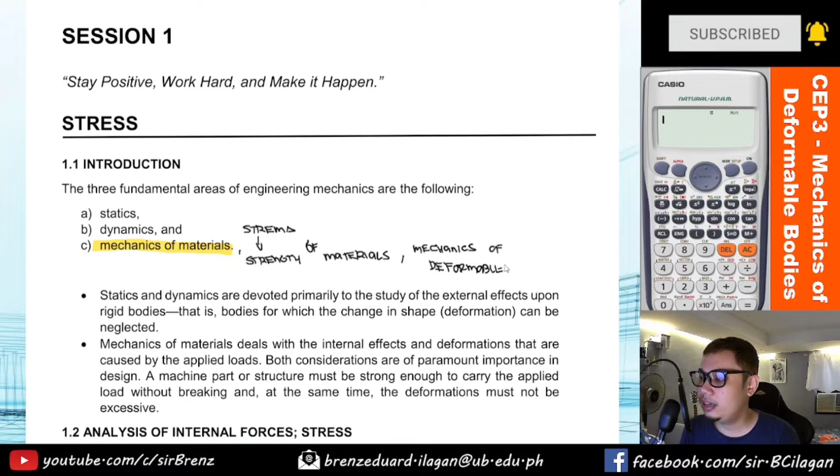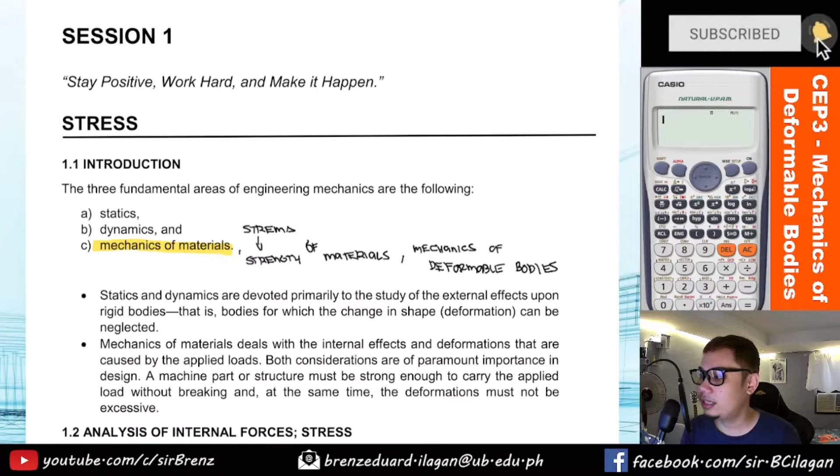So, basahin natin. Again, definition natin before, under statics and dynamics. So, these 2 areas are devoted primarily to the study of the external effects upon rigid bodies. So, bilugan ko lang yung rigid bodies. So, main concern natin dito ay yung mga external force and then yung magiging effect niya on rigid bodies. That is, bodies for which the change in shape, or the deformation, can be neglected.

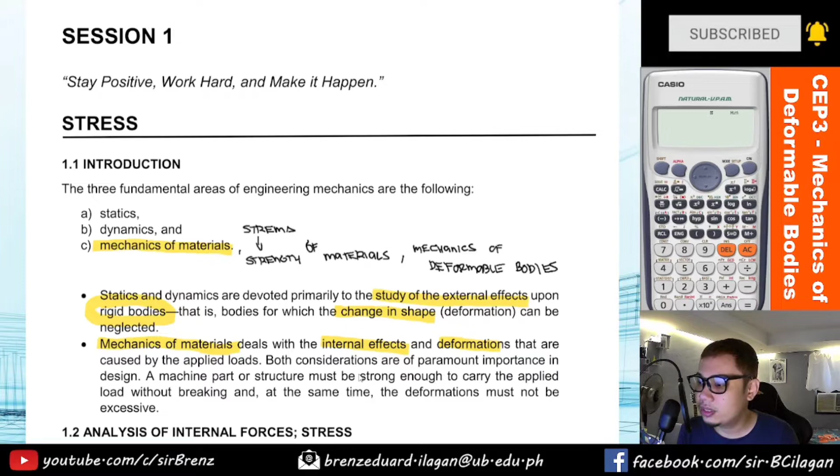Before kasi under SRB, ina-assume natin na yung deformation niya is sobrang liit na ni-neglect na natin siya. Pero dito, under mechanics of materials, kahit gaano kaliit yan, we need to consider that, especially when designing a part of a machine or any structure. Okay? So, both considerations are of paramount importance in design. So, a machine part or structure must be strong enough to carry the applied loads without breaking and at the same time, the deformations must not be excessive.

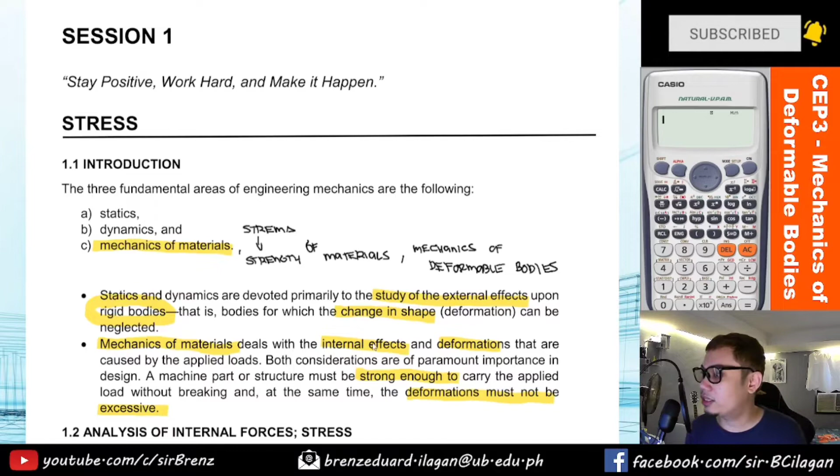So under 1.2. Analysis. Baba ko lang saglit. Analysis of internal forces, under stress. So, in mechanics of materials, we analyze to determine the internal forces.

Determine the internal forces. That is, forces that act on a cross-section that are internal to the body itself. Okay? So, just like for this figure, under figure 1.2, this represents the external forces acting on a body. So, meron tayo ditong body. This is in the shape of an S-shaped section. Ayan. Kung mapapansin nyo, meron tayong mga forces dyan na naka-applied, externally applied load.

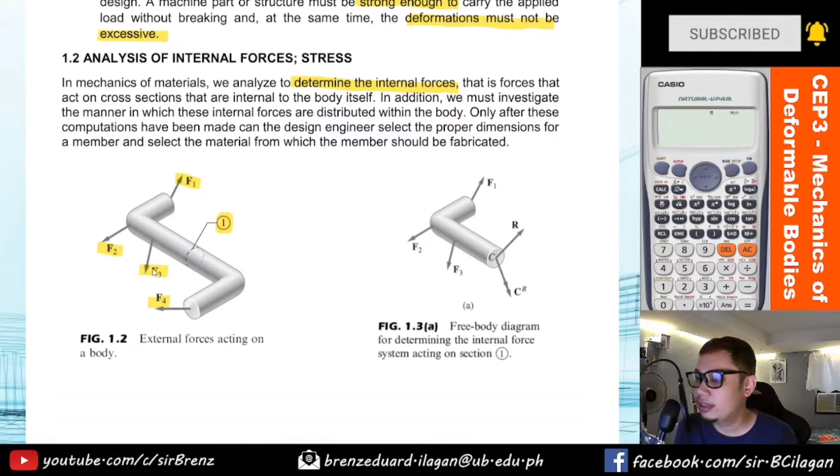So, we have F1 going in this direction. We have also F2. We have also F3. And we have also F4. Okay? So, ang sabi nga dyan, internal forces that act on a cross-section that are internal to the body itself. So, that section under the body is represented by this number 1. Napansin nyo yung 1, nag-section siya dito. And ano yung shape na nabuo sa section natin? Diba, as you can see, circular section yan. Tama ba?

So, lagi pala tong... Teka lang ha. Tulak.

Ayan. Circular section. So, again, because of this externally applied load, nag-cause siya ng internal reaction dito sa section 1. Okay? So, yung circular section na yan, sa formula ng stress, later on i-discuss pa rin naman yan, na P over A, so yan yung area natin, yung cross-section ng area, or yung section ng body na ina-analyze natin. Alright? So, only after this computation have been made can the design engineer select the proper dimension for a member and select the material from which the member should be fabricated.

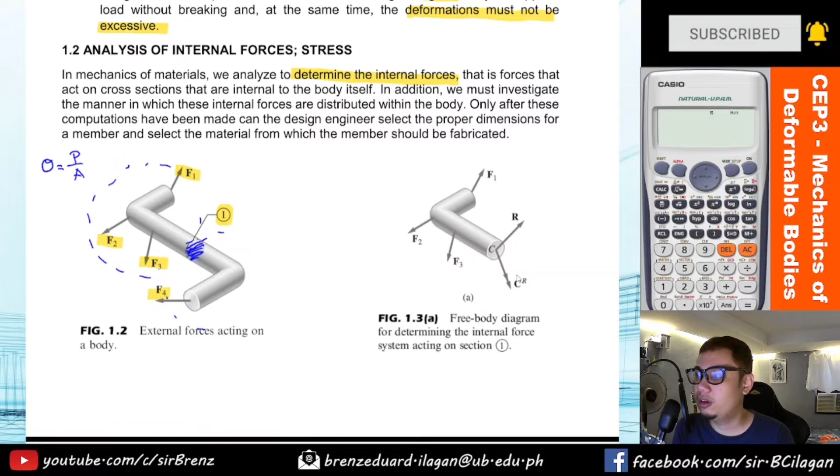Okay? So, again, under figure 1.3a, ano ba yung sinasabi nito? Kapag nag-section ka, maalala nyo, it's either i-consider natin tong upper portion, or pwede rin natin i-consider itong lower portion. Nagkataon lang on this figure, ang kinonsider is yung upper portion. And as you can see dito sa center ng inyong section, which is a circular shape, nagkaroon siya ng internal forces. So nandyan papasok si R, which is going in this direction. And meron kang C raised to R, or this is a couple. Okay? Couple moment.

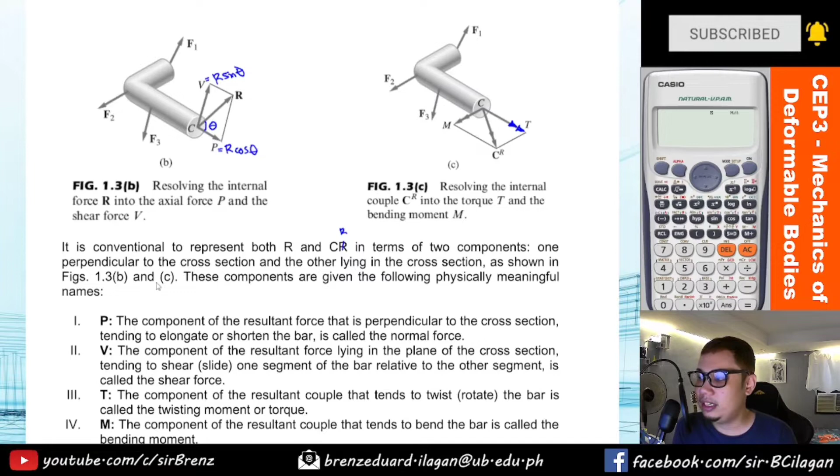Okay? So, and yung kanyang parallel component with respect to sa cross-section is represented by the symbol M. So, yung M natin, that represents the bending moment. So, from the term itself, bending, it causes the section to bend. So, these components are given the following physically meaningful names. So, i-define natin kung ano-ano yung mga forces na yan.

So, unahin natin siguro yung P. So, again, ano ba yung P natin? Based on the diagram, this is the perpendicular component of the resultant R. So, P is the axial force, the component of the resultant force that is perpendicular to the cross-section. So, this force P tends to elongate. When we say elongate, hinihigit niya. Or that is a tensile force, which tends to elongate or pahabain yung section, or to shorten the bar. So, kapag shorten, compressive siya. So, this is also known as the normal force.

Pero guys, on some books, this normal force, isa pang tawag sa kanya, pwede mo siyang i-define as your axial force. This can be also called the normal force. And again, this normal or axial force can be represented into two. So, meron tayong two types niyan. We have the tensile force and we have also the compressive force.

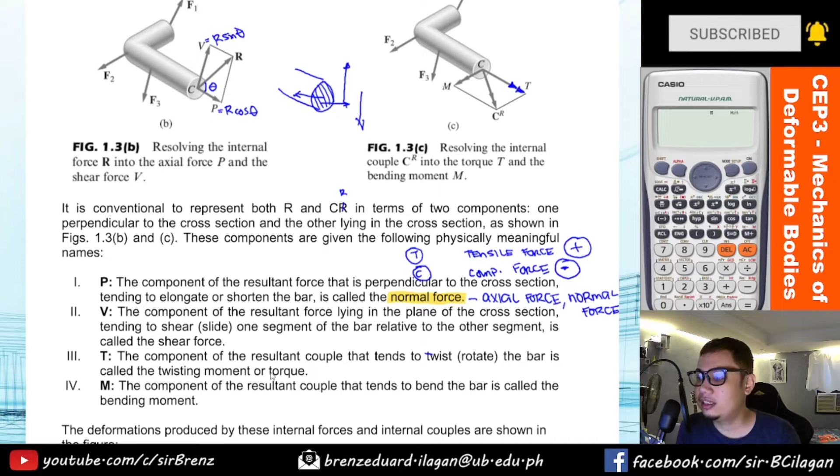Next, we have also the T. Yung T natin, that is just the torque. So, define natin what is T. This is the component of the resultant couple, yung C raised to R natin, that tends to twist or to rotate the bar, and is called the twisting moment or torque. So, another tawag for torque is the twisting moment. From the term itself, twisting moment, tinitwist niya. For example, ito yung bar natin. It's either pa ganyan yan, di ba? So, yun yung T natin. It's either represented ng pa ganyan or pa kabila.

So, twist. Yung moment mong ganyan, parang pinipilipit niya. Kung mapapansin nyo, parang nag-twist talaga siya. Ano ba yung kinakain natin nung bata, yung marshmallow na twist? Parang ganun yung concept niya. Twisting. And this twisting moment or torque, dyan papasok si torsional stress. So, that is another topic, I think module 3. Under module 3 natin, twisting moment or the torsional stress.

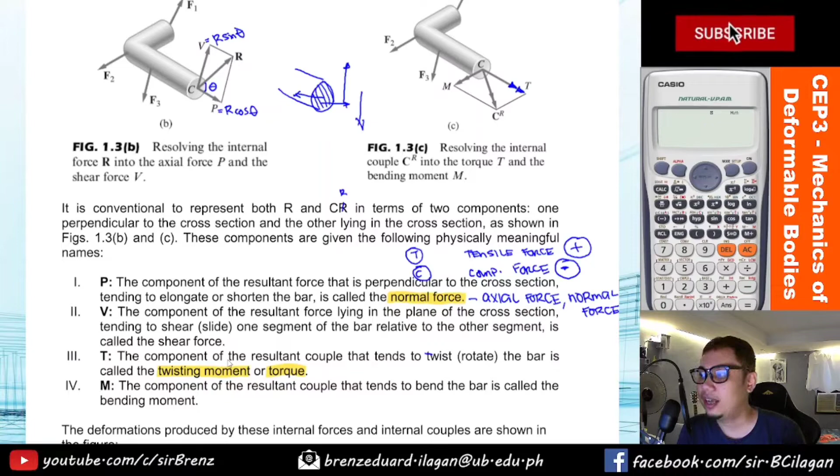And last, we have the moment or bending moment, represented by the symbol capital letter M. This is the component of the resultant couple that tends to bend the bar, called the bending moment. By the definition itself, for example, ito yung bar. Ang torsional stress is going in this direction, either pa ganyan or pa ganon. Yung bending moment naman, it's either pa ganyan, kung mapapansin nyo, na-bend. Pwedeng pababa, pwedeng pakaliwa, pwedeng pakanan, pwedeng pahilis. Basta parang binebend niya. Yung M na yan, gagamitin natin, guys, sa pag-compute ng bending stress. Those are stresses in beams, sa padulong part yan. That will be the last topic if hindi natin matatakal yung topic na deflections.

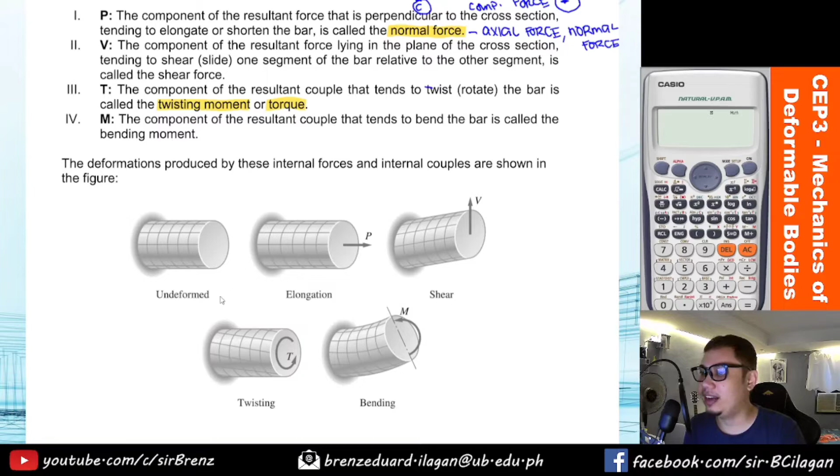And so, to further illustrate, ito pala, may diagram palang pinakita dito kung ano yung nangyayari. Based doon sa mga component nga ng mga internal force na yan, ito yung mangyayari doon sa ating bar na ina-analyze. So, this is the undeformed state. So, when we say undeformed state, walang nangyari sa kanya. Yan yung original shape niya. Yung mga forces na ina-analyze natin kanina, hindi pa naka-apply.

So, again, yung force P natin. Itong P na to, dinemonstrate nyo siya as a tensile force P. So, originally, ganito lang yung length. Ayan. So, ito lang yung length, original length ng iyong bar. But because of this axial force P, yung L mo nadagdagan ng certain deformation. So, mas humaba.

Again, yung axial force, meron pa siyang isang klase. So, ganito naman yung magiging itsura niya kapag compressive force yung in-apply natin. So, anong nangyari lang naman dito? Kung mapapansin niyo yung axis niya, kapag ginawa mo siyang compressive force, mas naging dikit-dikit siya. Yung axis na yan, nire-represent na yan, nag-elongate. Kung mapansin niyo dito, yung gap dito is lumaki, compare dito. And then, if the original length is L, ngayon naman, ibinawas mo yung deflection. So, mas lumiit yung rod natin.

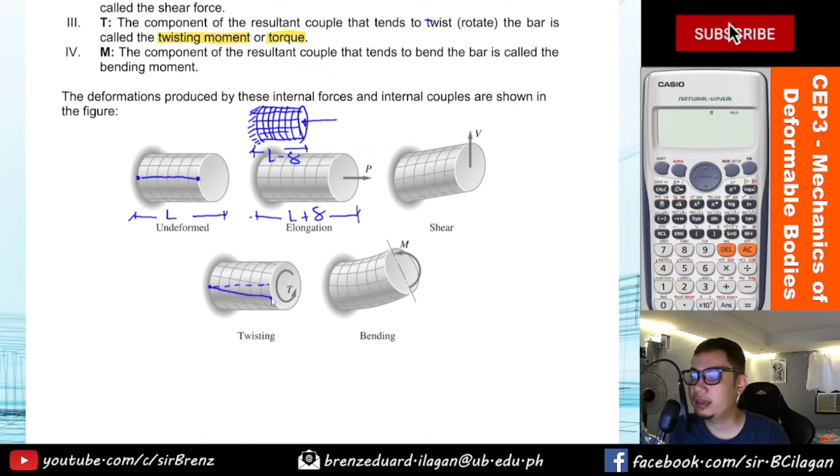Next, for the twisting moment or yung torque nga na tinatawag. Kung mapapansin natin, initially, pantay yan, diba? Ngayon, because of this twisting action, coming from this position, anong nangyari? Nagkaroon ka ng angular deformation or meron ka ditong theta. So again, itong theta na to, that will be discussed pa rin doon sa mga susunod na topics, particularly in the topic of torsional stress. Ito yung version ng deformation dito sa axial stress, yung simple stress natin. Parang ito yung counterpart niya pagdating doon sa torsional stress.

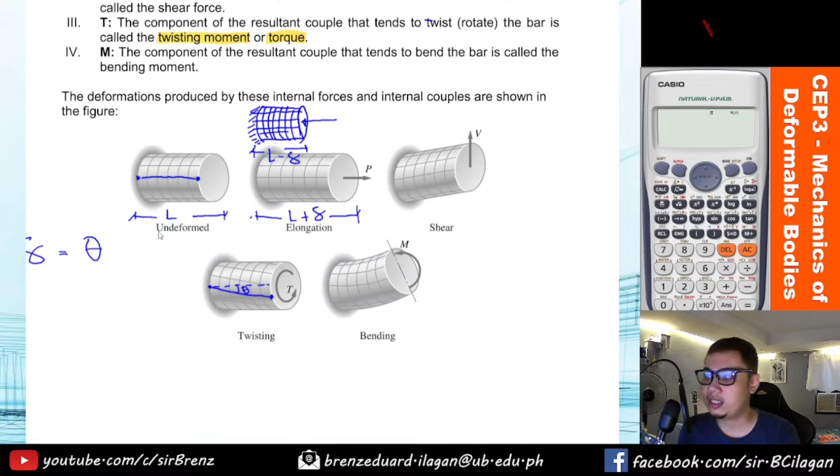Okay, so ano ba yung dimension ng stress natin? Ano yung unit ng stress natin? That is represented by the unit of force over L squared or the length squared. Yung L squared natin, that is just the area. So pwedeng meter squared yan, pwedeng inches squared, depende sa unit. So again, you need to review or recall the conversion from SI to English units.

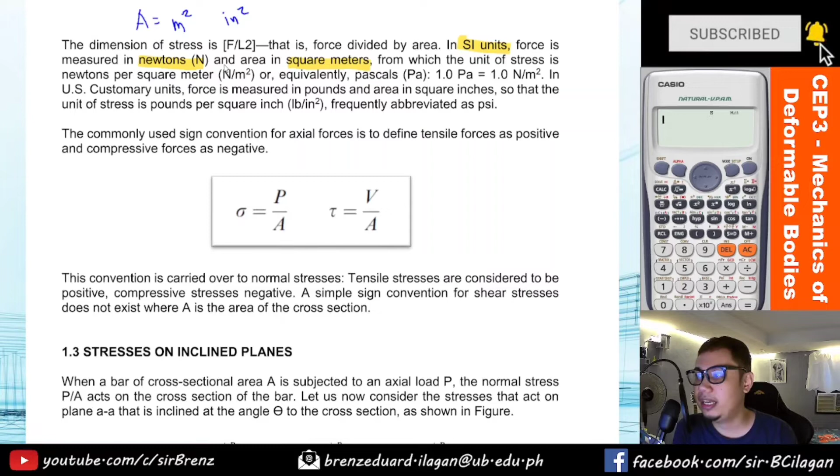In SI units, the force is measured in newtons. I know you're very familiar with newton. So pwedeng kilonewton yan. And area in square meter. So ito, yung newton per meter squared, that is represented by the unit of pascal. Okay?

In US customary units, force is measured in pounds and area in square inches. So the unit of the stress is in pound per square inch, or siguro mas kilala nyo sa tawag na PSI. Meron siyang isa pang version which is the PSF, or the pound per square foot. Pero wag din kakalimutan yung KSI because this is a common unit also of stress, so kilopound per square inch. Minultiply mo lang ng 1,000 or divide.

The commonly used sign convention for axial force is to define tensile forces as positive and compressive forces as negative. So ito nga yung na-discuss natin kanina. And the first two equations na gagamitin natin: we have the normal stress or axial stress, denoted by the symbol sigma, is equal to the axial force P over A. And we have the shearing stress, represented by the symbol tau, so that has an equation of shearing force V over A.

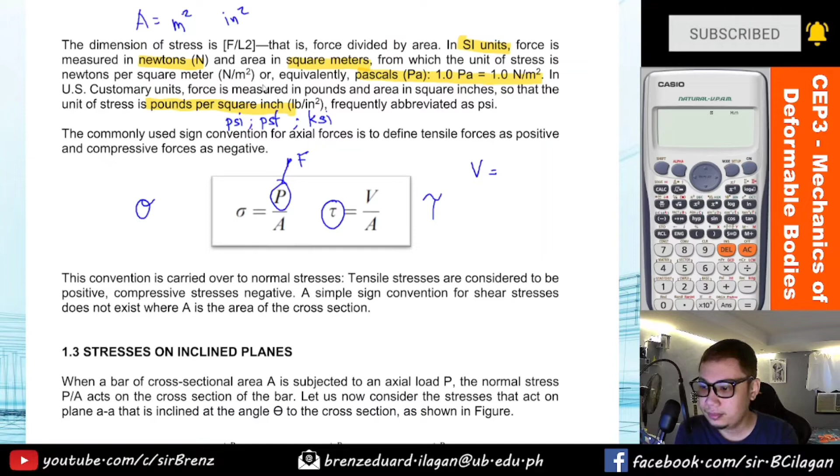A simple sign convention for shear stresses does not exist, where A is the area of the cross-section. So again, your cross-section, that's the A. So again, A is in units of area. Alright, let's proceed with the next discussion.

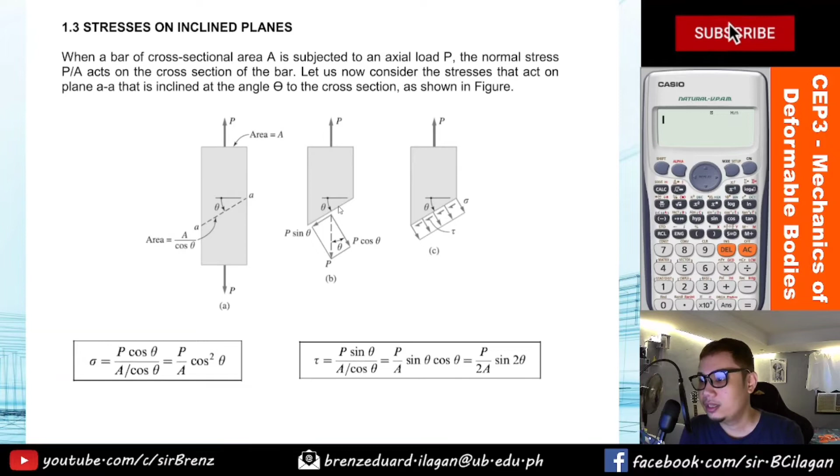Just like in this example, when a bar of cross-sectional area A, if you look at it from this view, what do you see at the top? Let's just say this is the shape of a square. So that's our cross-section. The P acts in the tensile direction.

So here's the area. The shaded part, that's our area. The normal stress P over A acts on the cross-section of the bar. As you can see here, this section AA is inclined. If you section it and analyze the internal forces acting on this part, it splits into two components.

Because it's an inclined surface. Or if you're going to analyze the stress acting on this inclined surface particularly, here's the force P. It is acting inclined at a certain angle, theta. Again, by definition, the normal force P, or the axial force, should be perpendicular. But you're not perpendicular to this inclined surface. That's why you need to get this component.

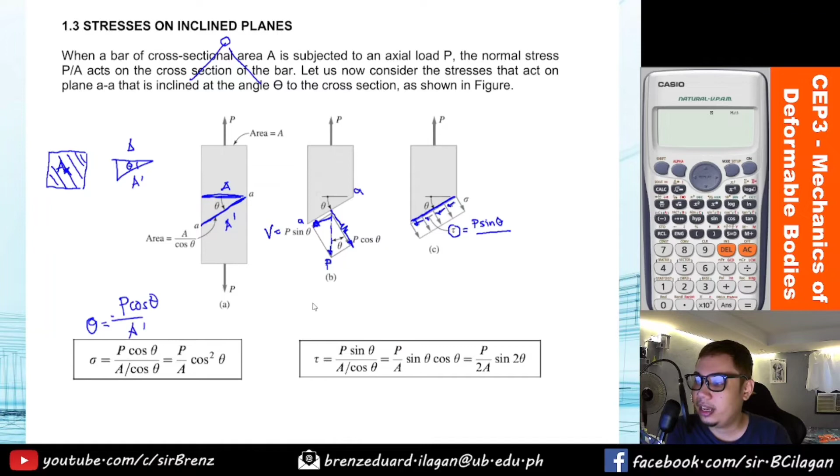Again, A prime is the area we need. Okay, so here's what happens: that is P cosine theta over A prime. And for the shearing stress, that is your shearing force, which is P sine theta over the inclined area. So how do we get the inclined area?

Right, by using the trigonometric function cosine theta. So A prime becomes like the hypotenuse. So A over A prime, or in short, your A prime is just equal to A over cosine theta. If you notice here, that's it: A over cosine theta, so it was raised up.

So the final equation is P over A cosine squared theta. And for shearing stress, when that was raised, sine theta, cosine theta - recall our trigonometric identity, sine 2 theta equals 2 sine theta cosine theta. That's why it was divided by 2. Okay, so just keep that in mind.

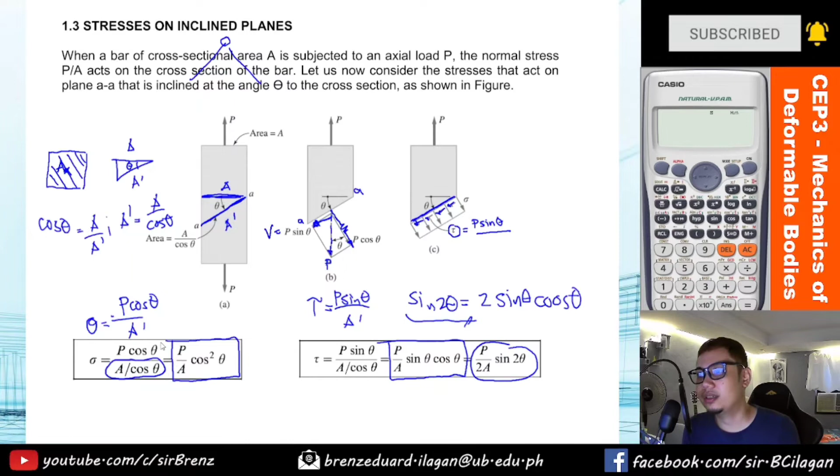So, procedure for stress analysis for an axially loaded member, or the axial stress. This is the step-by-step procedure. In general, the stress analysis of an axially loaded member of a structure involves the following steps. The first one is the equilibrium analysis.

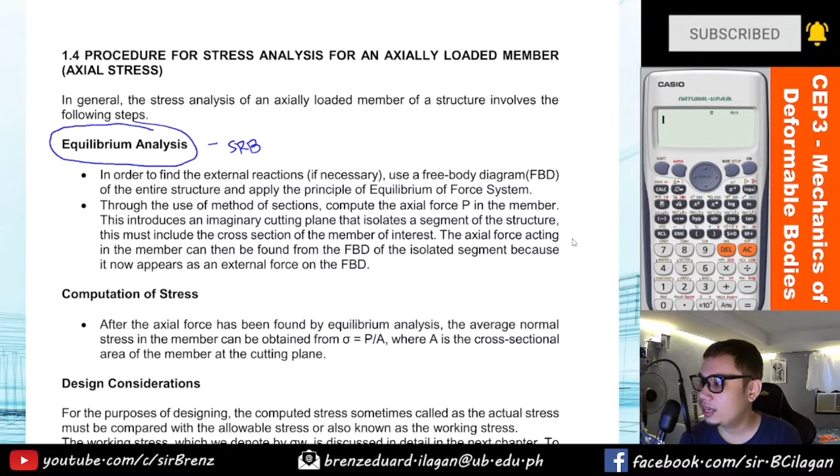This is the part of statics - the equilibrium of force system - in order to find the external reaction, if necessary use a free body diagram. Make a free body diagram for the entire structure.

After making the free body diagram, the next step is the principle of equilibrium of force system. Again, we have 3 equations to use: the ever-reliable summation of forces X, summation of forces Y, and summation of moment. When in equilibrium, all of these are equal to 0.

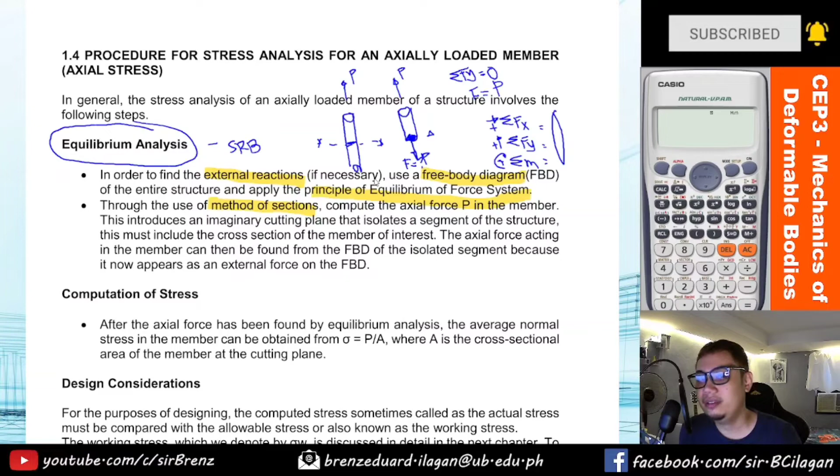Okay, so let's now consider the design consideration. Let me get the highlighter. For the purposes of designing, the computed stress is sometimes called the actual stress - the stress we computed during what actually happened. For example, this rod is carrying a load P - what stress develops? That's the actual stress we're talking about, or the computed stress, what happens in that scenario. This computed stress must be compared with the allowable stress, also sometimes called the working stress.

So, working stress is equals to the allowable stress. The working stress, which we denote by sigma sub W, is discussed in detail in the next chapter.

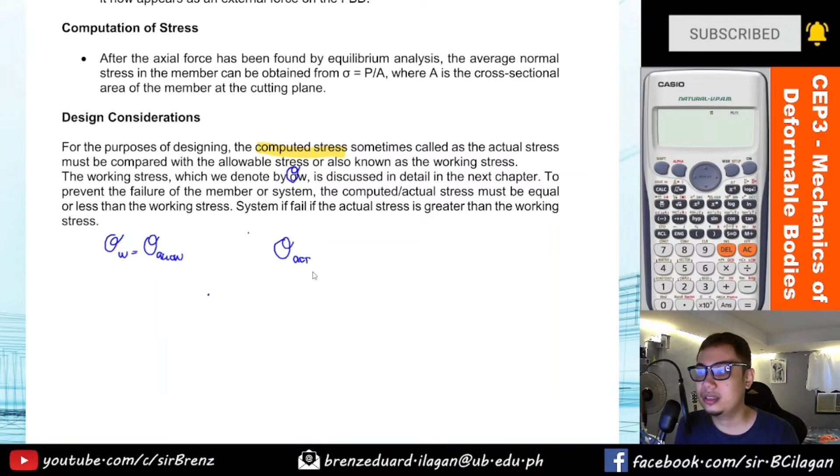So, to prevent the failure of the member or system, the computed actual stress, computed based on the applied load during that time, should be equal to or less than the working or the allowable stress.

So, that's it, this is just my allowable stress. For example, let's assign a value. Let's say the allowable stress or the working stress that it can handle is limited to 100 kilopascal.

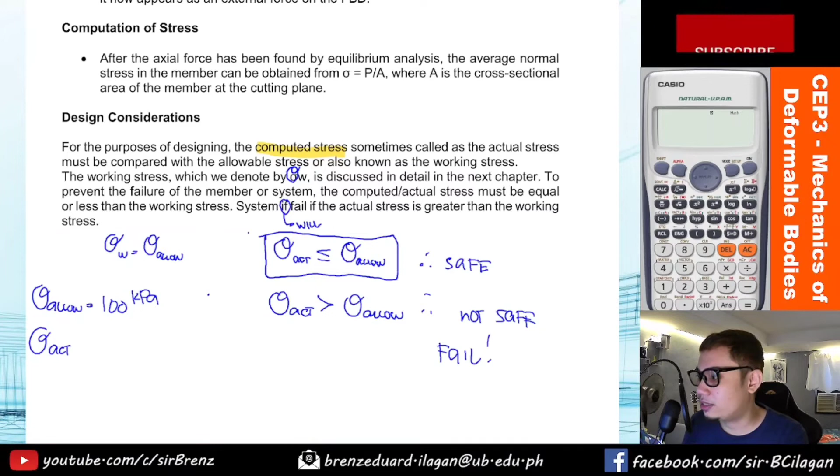So let's proceed with the next part of the discussion. This time, we're going to discuss what we call shearing stress.

Shear stress, one way to describe it, is tangent to the plane on which it acts. Shear stress arises whenever the applied loads cause one section of a body to slide past its adjacent section. So again, remember this word, it tends to slide past its adjacent section, a sliding action.

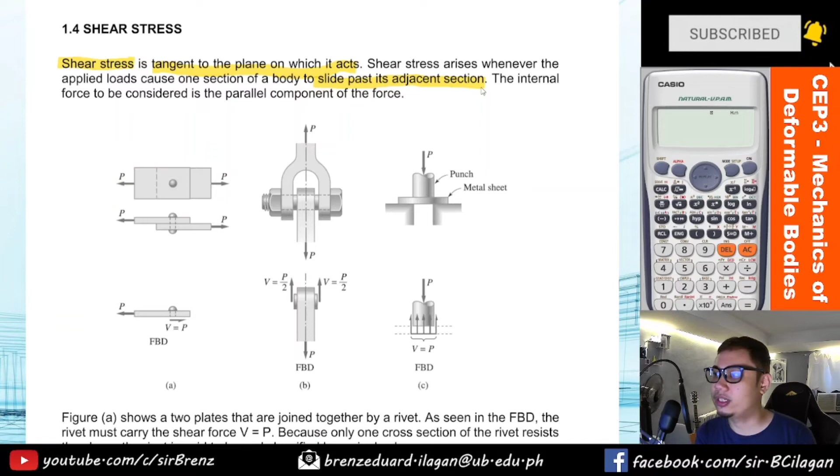So that's right, tangent, like when something is tangent, it just touches. So the internal force to be considered is the parallel component of the force, and that's the keyword, parallel.

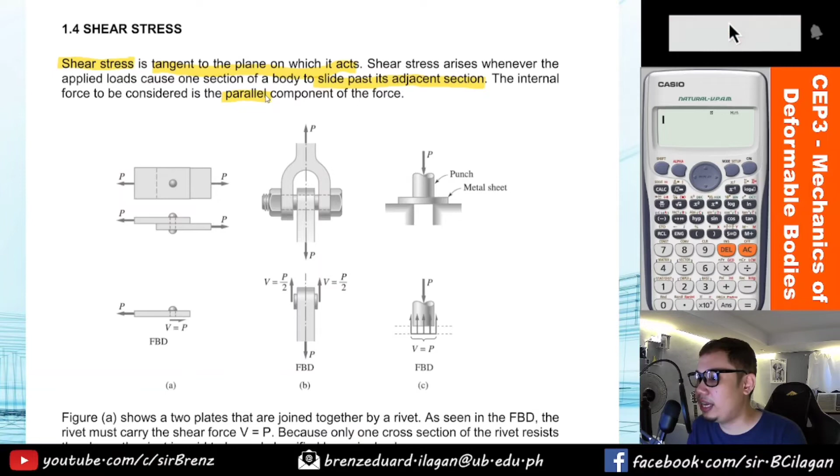In the figure shown, there are three cases of shearing stress presented. In figure A, this shows two plates, you have two plates, which are joined together by a rivet. So the rivet is like the screw here, this one.

Let's highlight this. As seen in the free body diagram, when we take the upper plate, there's an externally applied load P. So the rivet must carry the shear force, since the rivet is cut here.

So if there's a load going in this direction, the internal force or internal reaction felt by the rivet based on this externally applied load P, which goes in this direction to the left, means the shearing force V is equal to P. How did we get that? Assuming V is still unknown, what equation do we use to solve for V? Right, just by taking the summation of forces in X equals to 0. So V minus P, then you transpose it to the other side, so it becomes like that.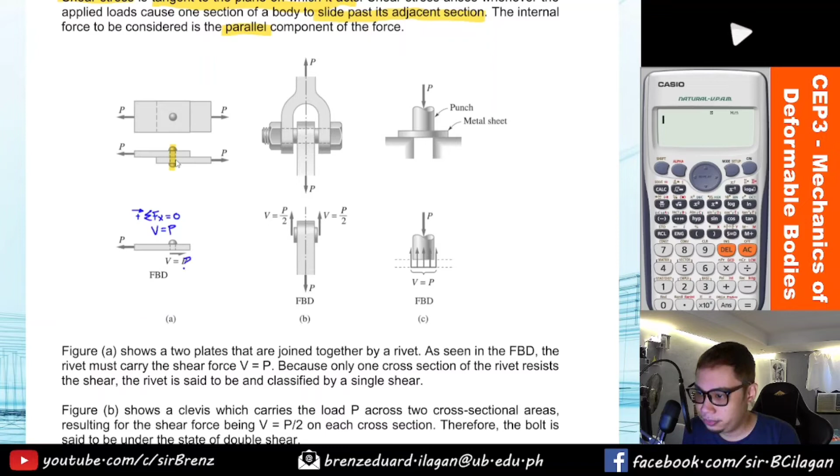So as seen in the free body diagram, the rivet must carry the shear force V, which is equal to P. And because only one cross-section of the rivet resists the shear, when you section it, usually the shape of the rivet, if you look at it here, let me zoom in so you can see it clearly, this is the area we need to consider. Is that clear?

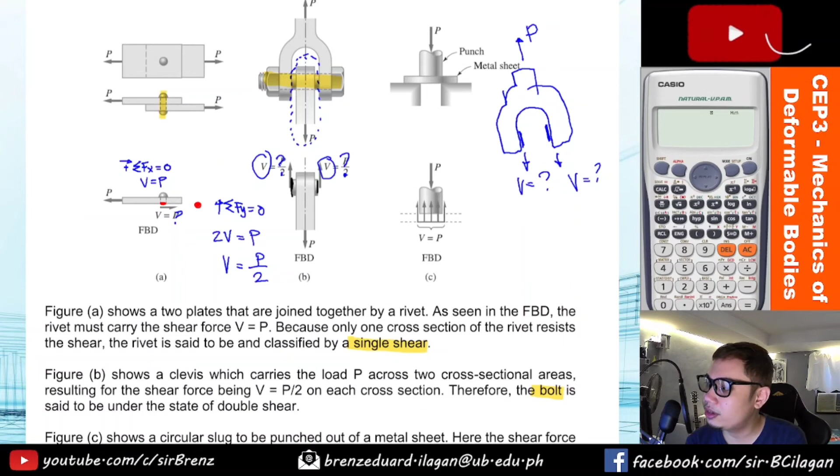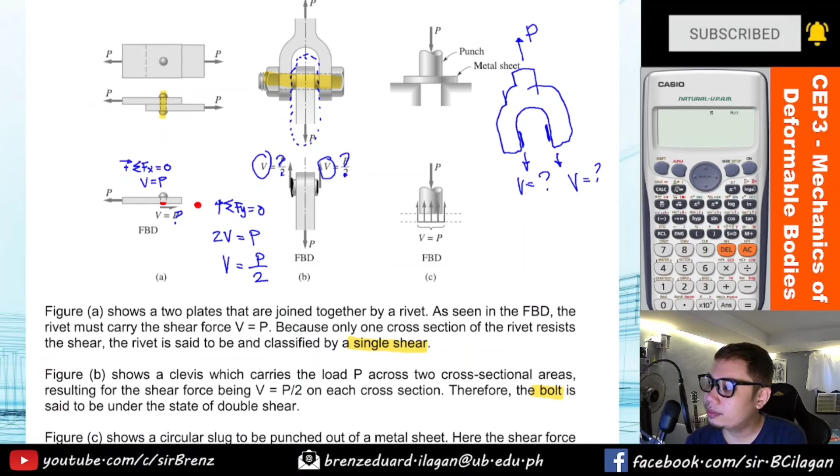So, figure C shows a circular slug to be punched out of a metal sheet. Here, the shear force is P, which acts on the perimeter of the puncher, and the shear area is similar to the milled edge of a coin. Kita nyo yung gilid ng piso or any coin, yung merong mga linya-linya sa gilid. So, yun yung sheared area for this example.

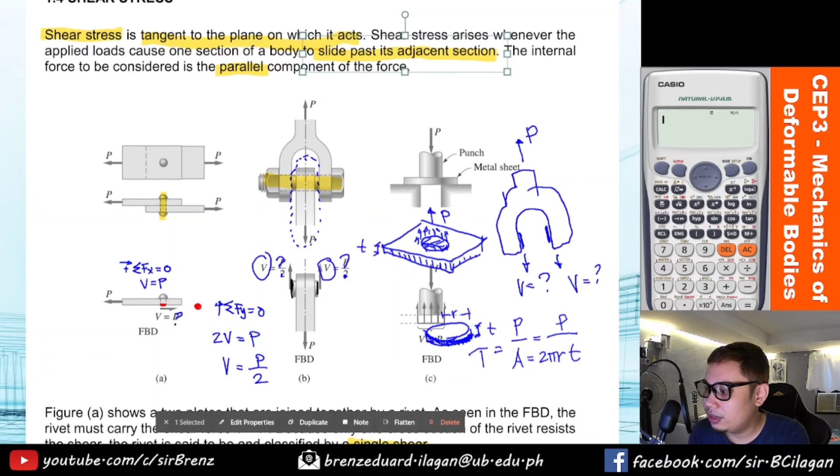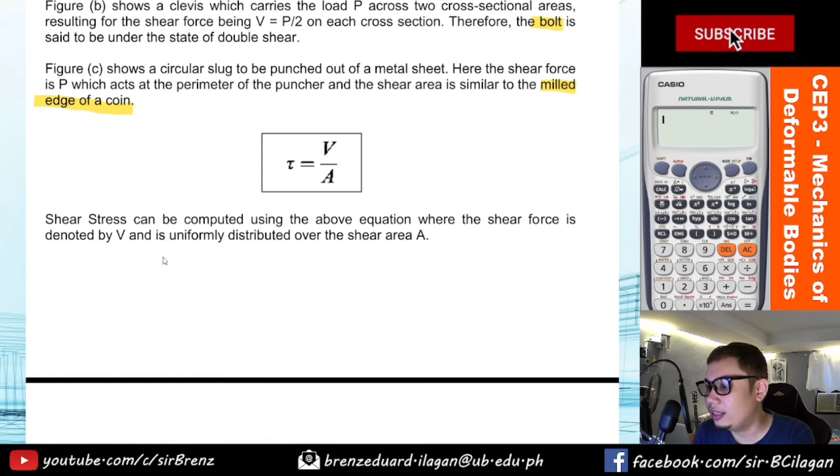Ayan. So, again, shearing stress has an equation of shear stress is equals to V over A. So, shear stress can be computed using the above equation where the shear force is denoted by V and is uniformly distributed over the sheared area.

Okay, so next type of simple stress is yung tinatawag nating bearing stress. So far, meron na tayong tatlo. Again, i-recall lang natin, guys. Una is the axial stress or the normal stress, which is meron siyang dalawang type. We have the compressive stress and the tensile stress. Pangalawa, we have the shearing stress. Shearing stress, meron siyang tatlong category. Meron kang single shear, double shear, and yung punching action or yung punching stress, kung pwede rin natin tawagin.

And then, the third type of simple stress is yung tinatawag nating bearing stress. So, what is bearing stress? So, as defined, yung bearing stress mo is the pressure caused by two bodies. Ito yung palatandaan ko dyan. Caused by two bodies are pressed against each other, compressive forces are developed on the area of contact. So, tandaan nyo na lang, guys, na kapag bearing stress, ito yung contact pressure between the two material. Okay? So, yung isang dimension manggagaling dun sa isa, and then yung isang dimension is manggagaling dun sa isa.

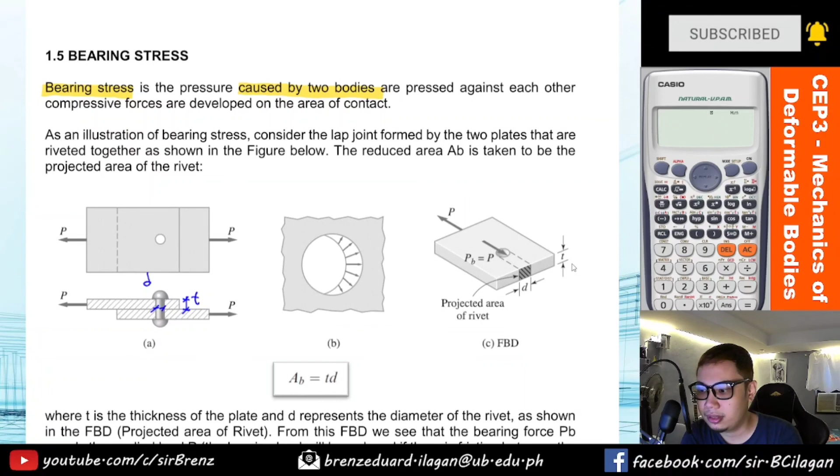So, yung isang dimension is manggagaling saan? Doon sa plate. So, itong plate na to, guys, meron siyang thickness. So, yung isang dimension is yung thickness ng plate, this one, and yung isang dimension is manggagaling dun sa rivet, which is the diameter of your rivet. Ayan. So, yung projected area or yung bearing area na i-consider mo dyan, which is denoted by A sub B, is equals lang sa product ng thickness ng plate times the diameter of the rivet.

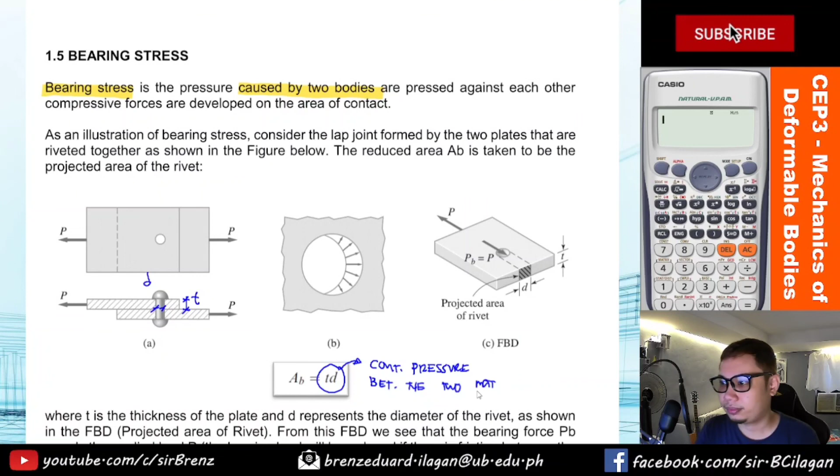Ayan. The contact pressure between the two material. Okay, so where T is the thickness of the plate and D is represented by the diameter, as I've said, as shown in the figure, projected area of the rivet.

So from this free body diagram, we see that the bearing force P sub B is equals to the applied load. The bearing load will be reduced if there is friction between the plate. So kapag wala namang friction, guys, yung applied load P, hindi na siya mababago. So that the bearing stress becomes, so ayan, ito parang normal stress lang din daw eh. So bearing stress is just equals do sa bearing force over the bearing area, which is equals sa P kapag wala nga friction over T times D.